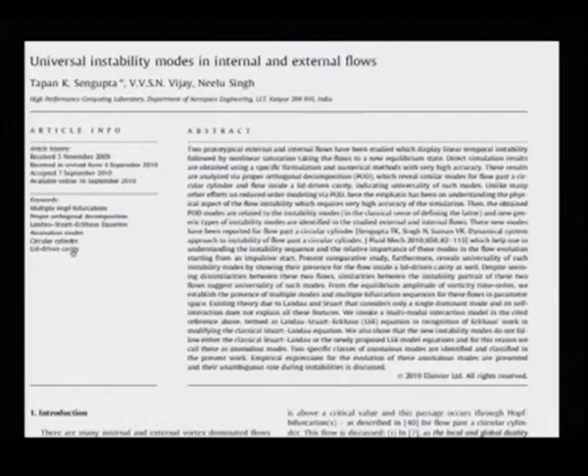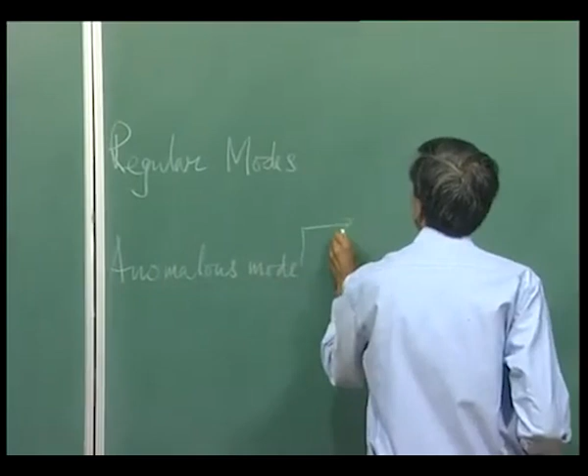So we have discussed an external flow. Today we are going to talk about an internal flow, and then show that the modes we talked about - 3 classes of modes, if you recall: the regular modes, then the anomalous modes, and there we talked about the first kind and the second kind for flow past a cylinder - so now we are going to see if these are generic enough to be visible in other flows also.

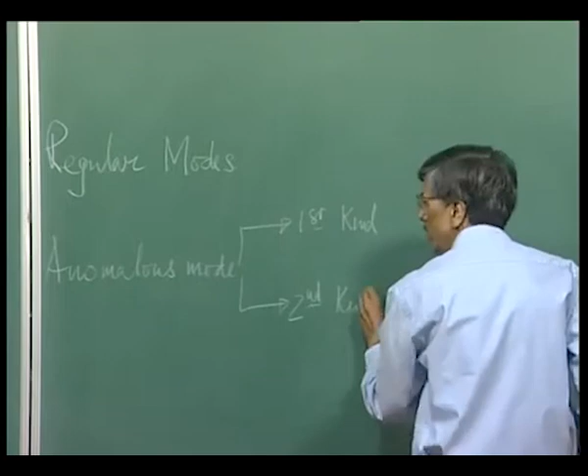So what we have done is undertaken to study the same thing for an internal flow. This is basically a lid driven cavity problem, as shown here. What we are going to show you here is a picture that will demonstrate what is going to happen.

We go through the same process of solving the Navier-Stokes equations and getting those solutions, then obtain the instantaneous flow, then obtain the mean flow, and then we calculate the disturbance flow. Once you have the disturbance flow, you obtain those Galerkin projections that we are seeing, and this is what your driven cavity problem is.

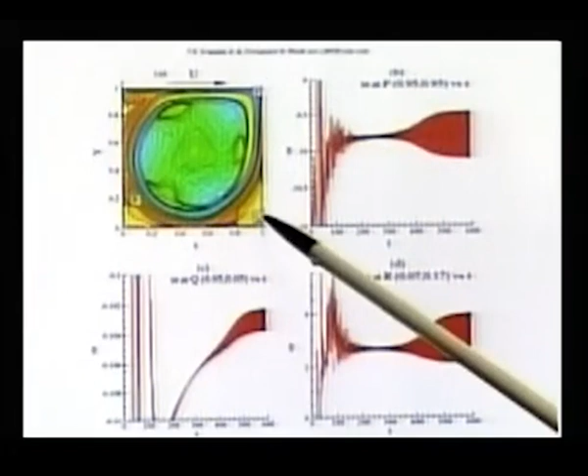What you have here is basically a square cavity. The flow is set up by moving the top lid from left to right at a constant speed u, and then we focus our attention on 3 representative points marked here as P, Q, and R. P is the topmost right corner point, Q is the bottommost right point, and R is over here.

Now, what you notice is depending on where you focus your attention, you see a different time evolution of this disturbance vorticity as a function of time. However, the common feature you are seeing here is almost the same: you start off with a semi-quiescent stage, which is perturbed by linear instability, and that linear instability is modulated by nonlinearity. That is the typical picture that we saw.

What is the essential difference between this flow and the flow past a cylinder? Here the initial flow is very chaotic, whereas in case of flow past a cylinder, what we saw was flow being completely steady. So the instability was building up on a steady flow, and here what you are seeing is the linear instability building up on a very transitory flow - it's showing very massive transients.

Now if you look at the other point Q - Q is one of those corner vortices, what we call Moffatt vortices. Even there, we are seeing the disturbance growing with time, but at the same time the mean is shifting. Recall we talked about the shift mode. What was the shift mode? Shift mode was this.

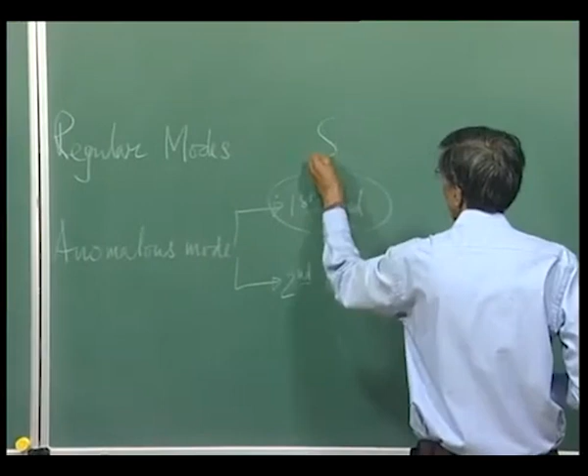This was what we called the shift mode. So here also we are seeing the same kind of thing: the mean is shifted, but overriding that mean you have the fluctuation that grows linearly and nonlinearly saturates. And this point, which is outside the corner vortices, also displays the same thing.

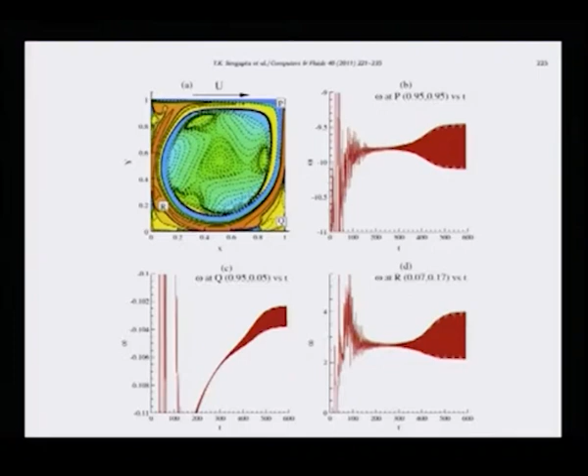So in a sense, what we are talking about here is the same type of behavior that we saw, but let me show you what we are going to see next. If we now obtain the equilibrium amplitude and plot it as a function of Reynolds number, then what we get is the equilibrium amplitude versus Re for this lid driven cavity problem.

And exactly like what we saw there, it is not a purely parabolic profile as the Landau equation would have demanded, but instead this equilibrium amplitude falls on various polynomials, and that, in concert with what we talked about earlier regarding multiple Hopf bifurcation, shows different Reynolds numbers noted here. As you can see, the first one is around 7,933, the second one is at 8,187, and the third one shown here is 9,953.

So essentially, whatever we have seen for flow past a cylinder is depicted here, and the corresponding experimental results by Strykowski are shown here - you get to see exactly a similar phenomenon, that it is not purely given by the Landau equation, but falls on various branches of bifurcation. This lends credibility to what we have been talking about in terms of the universality of this kind of instability modes.

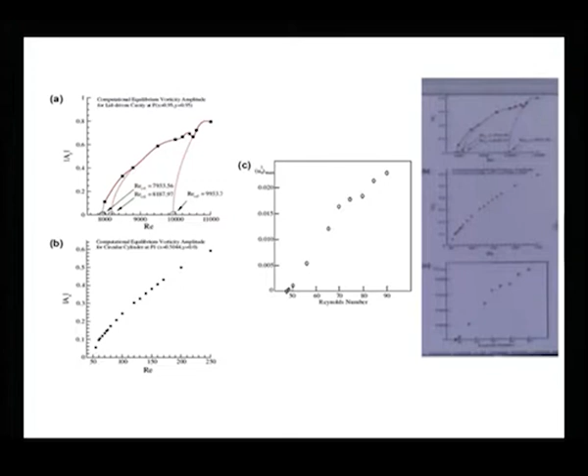And this was the result that I told you about Strykowski's experiment, and you can very clearly see there is one set of data here, another set of data here. So, this is not something that is just a construct of the computations, it does come out from experimental viewpoint also.

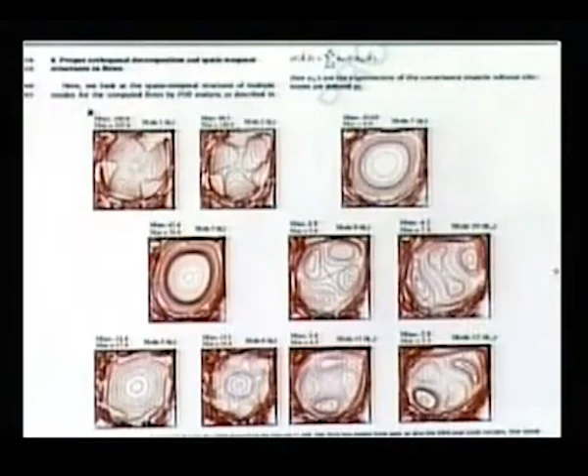And what is this? This is nothing but your anomalous mode of the first kind, the shift mode that we talked about, which appears singly. This has got no pair formation. Then of course, that would mean that if I am calling it 3, 4 would be the missing one. So this we have 5th and 6th, right. Again we have a 7th isolated one. This is also shift mode, or anomalous mode of the first kind, or T1 modes that we talked about.

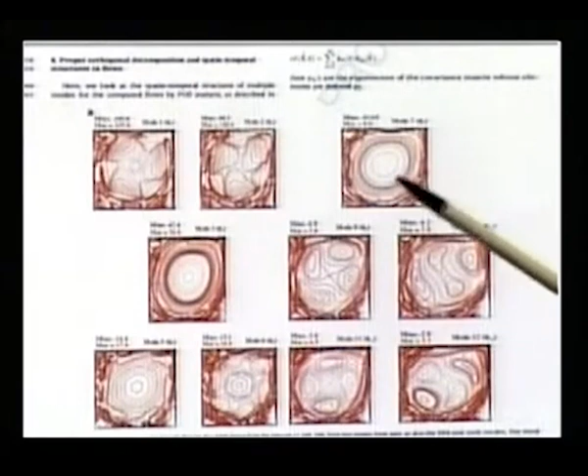Now, these are two pairs, these two are pairs, but they belong to this T2 kind. And how do we know? Well, you have to plot the amplitude functions. You will have to plot am of t. And once you do that...

Well, here are the pictures. A1 and A2, as you can see, is plotted here. They do indeed follow like the Landau equation. That is why we call it a regular mode. This is your mean zero line, and you are seeing the fluctuations, right?

And we have the third mode here, which was that shift mode we talked about, which appears singly, and that you can see does not start off from zero like flow past a cylinder, because of the strong transient nature of the flow to begin with. So it starts off with some value, but it does go and settle down eventually there.

And this is another regular mode pair. You can see that during the transient state, they do not have the pure orthogonality kind that you expect from POD modes. POD modes are supposed to be orthogonal, but they do not remain so. So it's very instructive for one to understand what is going on here.

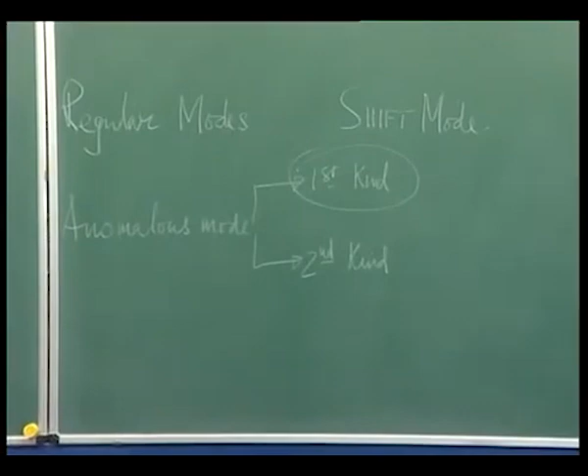So, that is the way to go about it. You do the singular value decomposition of the correlation matrix, you get the eigenvalues, that also gives you an idea of pair formation, etc. Then you look at the eigenfunctions, that gives you some additional information about it. But whether they are truly going to give you this sort of classification into regular and anomalous modes or not will be very clearly brought out when you take a look at that amplitude function Am of t. So this is a 3-step procedure. You cannot just simply look at one set and comment about it.

One thing you must realize also, though, is that people in performing POD have not been cautious enough. You are doing direct simulation here. You may be doing the same thing in an experimental framework, right. But then when you are trying to do POD, what is its sampling rate going to be? That is a very vital question. And that is where I think the rest of the world has really not done the homework properly.

Because if I am doing a kind of sampling of a time dependent function, I have to do it properly to capture the appropriate frequencies. Most of the time people may be doing high fidelity calculations, but when it comes to POD modes, they have been niggardly.

They take far fewer frames. And then, once you decide upon the sampling rate of POD analysis, that restricts what you are able to see. These kinds of simulations have been done to pick up this kind of frequencies. If I had taken what you are seeing here, we have shown it from 200 to I think 600.

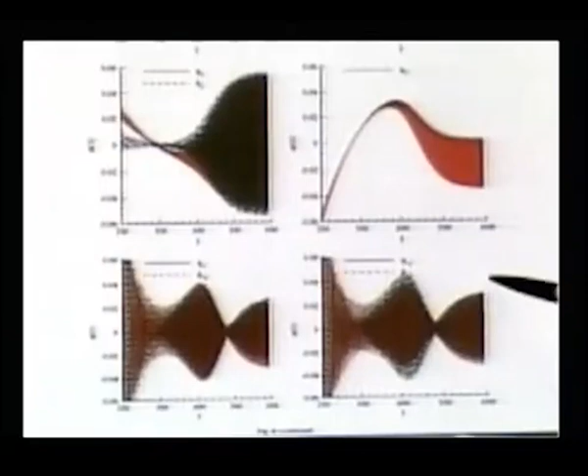So here the time interval, the sampling rate, is of the order of about 0.01, 0.02, that kind of thing. So you can imagine the volume of data you will have to handle to do a POD. And if you do not do it, you will not pick up all these frequencies.

So you must pay heed to the requirement of resolution, and this is a very vital issue that we must talk about. Now these are some of the things that we have seen for our circular cylinder. So there is no question about it, and these were also the sort of mode shape that we have seen for flow past a cylinder.

We have seen that the regular modes here, 1 and 2, then we have the shift mode, then we have another set of regular mode. This is a very interesting thing: in the end you get to a regular mode, but in the transient phase once again they are dissimilar. The individual components are dissimilar.

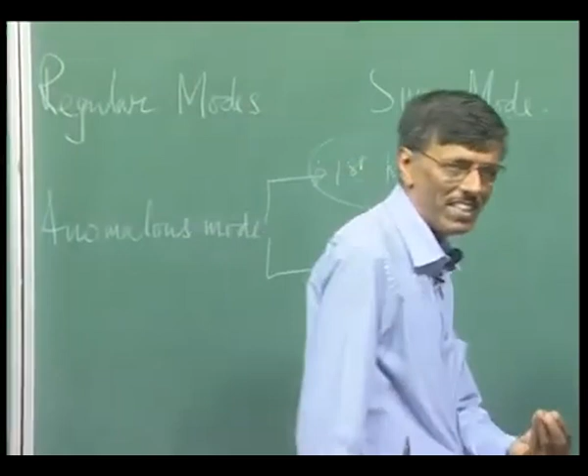Same thing over here. Should we call it a kind of T2 mode, or is it a kind of admixture of a T and R mode? Whatever we do, we need to understand that these elements are the basic ingredients. Whatever we are seeing at the end of the day is basically a kind of mixture of all these things that we see.

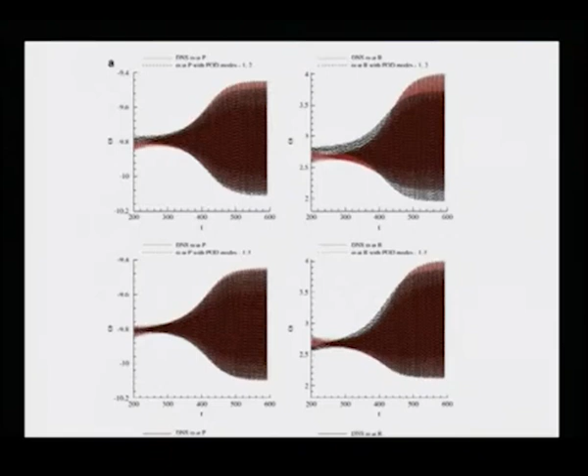Now this is what you are going to get when you look at the DNS of that internal flow, and here also you can notice that despite the talk of universality, there is some bit of difference in behavior of the successive modes at different locations. But by and large you can really capture the events we are noticing: linear instability followed by nonlinear saturation and mode behaviors belonging to either of these 3 generic classes.

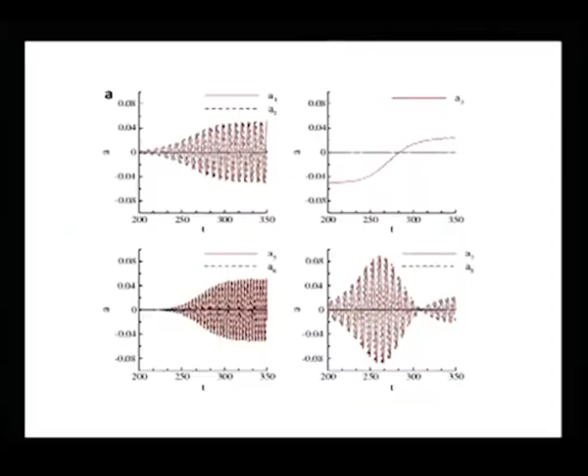Okay, so I suppose one can go ahead and do all this. These are those mode shapes for cylinders. I think what we are essentially looking at is a mode shape for flow past a cylinder at Reynolds number of 60, and again you can see these two are those regular modes. This is the T1 mode and this is the T2 mode, and so on and so forth. So you can study these as a sort of universal building blocks.

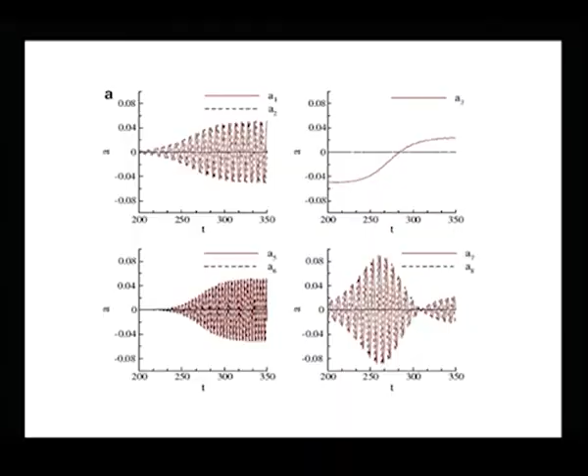Okay, so I think what I would do is close the discussion here on POD analysis. I suppose you have now seen quite a bit of variations. Now we go to the last phase of our course, and that is basically talking about turbulence.

So if you look back, the flow that we see in nature or in engineering devices, most of the time they are going to be turbulent, despite the fact that this part is considered to be a special topic in studies of fluid mechanics. But it is a sort of interesting thing, because this is not the exception, this is the rule. All flows are turbulent, but very little attention is paid to it.

There are various reasons for it, because we still do not understand what turbulence is. That is what we have said, that there are no precise definitions of turbulence. There are lots of people who can rattle off strings of sentences, turbulence is this, turbulence is that, etc. They essentially tell you about the characteristics of most turbulent flows. I am going to talk about some of those characteristics one by one, but please do not misquote me by saying turbulence is irregular flows, that's just one aspect. It is not going to be adequate.

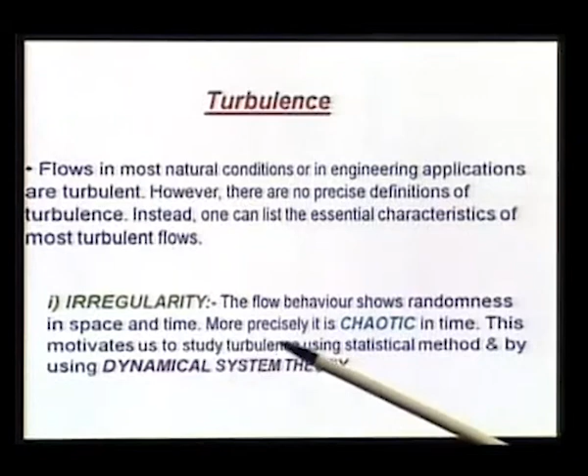That is what we have done with our POD analysis, that we will take a completely stochastic dynamical system and project it onto a deterministic basis. So those deterministic bases are nothing but your so-called coherent structures of turbulence. That is why people may like to study turbulence using statistical methods, or they may like to study it in a dynamical system framework like what we have just done.

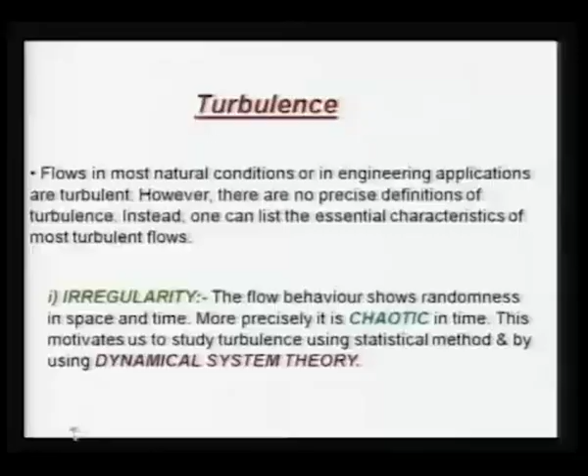So irregularity is one feature of turbulent flow. There is another feature, diffusivity. If you go back to when we were discussing bypass transition caused by those convecting vortices in the free stream, what did we see in that flow visualization picture? The dye that was coming out nice and straight got diffused. There was a significant increase in mixing, diffusion. So whenever you see turbulence, you must also understand there is enhanced mixing, characterized mathematically by the process of diffusion. Diffusivity is very, very important in turbulence.

They represent rapid mixing in terms of all quantities of interest. There could be mass diffusion—if I add a dye and it gets mixed with the adjoining fluid, that is basically mass diffusion. At the same time, when I see a shear layer developing, the flow undergoing transition and becoming turbulent, what do I see? Thickening of the boundary layer. So the mixing is occurring over a larger wall-normal distance—that is enhanced mixing of momentum. And of course, when mass and momentum are transferred, that leads to energy transfer too.

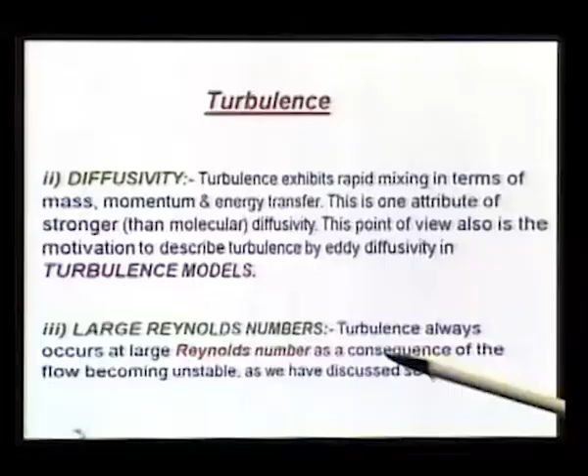There is another thing very typical of turbulent flows: you would hardly ever get turbulent flows occurring at low Reynolds number. But please mark my words very carefully—whenever we talk about turbulent flows, we are talking about turbulence generated by some mechanism which is also self-sustaining. Remember that experiment when we dragged a single vortex? What happened when we removed the vortex? Things again came back to normal.

Would I call that a generic turbulence? No, because that was more like forced vibration.

But when we are talking about turbulence, we are more talking about natural vibration. So it is self-sustaining, it should be there, it should be there, and that kind of self-sustenance comes about when your basic equilibrium flow is unstable. So instability is the core of everything.

That is why in this course, although it is titled Transition and Turbulence, I have spent most of my time talking about the transition aspect, with twin objectives. One, all these phenomena are instability driven, and two, to basically fight the ghost of the commonly held perception that turbulence is universal.

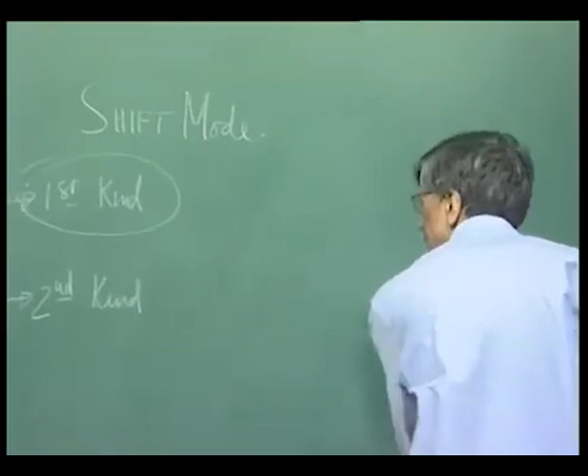There is the other aspect of turbulence that we must keep in mind. This has to do with the way we look at the Navier-Stokes equation. If I write down the Navier-Stokes equation...

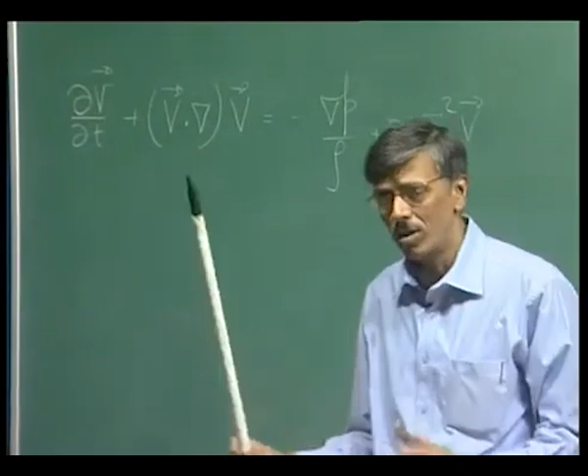Then we can understand the basic processes, which are very clearly understood. This is the local acceleration at any point, the time rate of change of events occurring, that is what is given. This is your convective acceleration. This is the way, let us say, the pressure is driving the flow. You may have it, you may not have it.

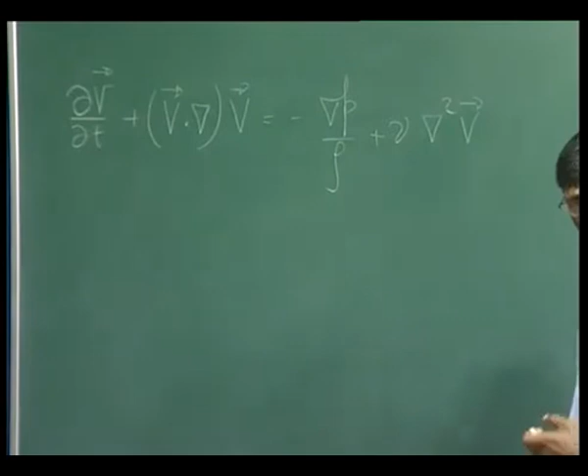Then of course, this is the viscous diffusion. Of all the terms that you see, this plays quite an interesting role. This is your nonlinear term. If you are a mathematician, you would say it is a quasi-linear term, because the highest derivative is second, and that is where it is linear. But this is a nonlinear term that plays a significant role in determining the dynamics.

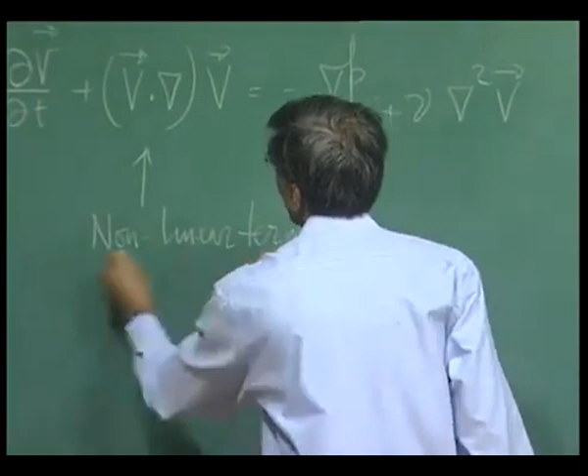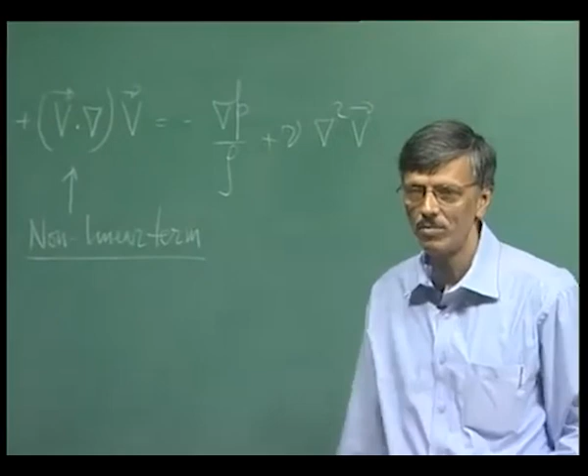We have already seen that all instabilities do start up from here. Why? If you recall, we have written down the Navier-Stokes equation in rotational form. What happens? I can write it down in terms of v cross omega and gradient of v squared by 2.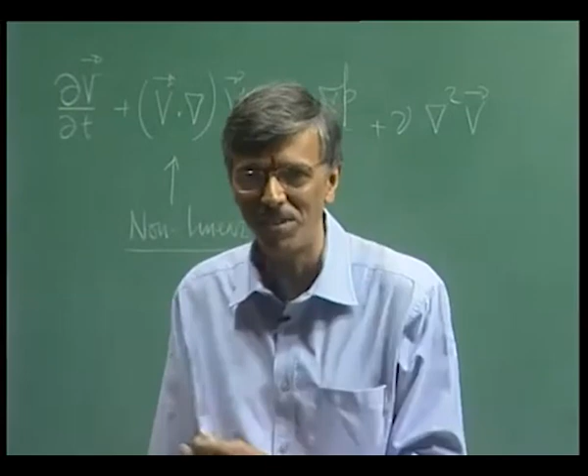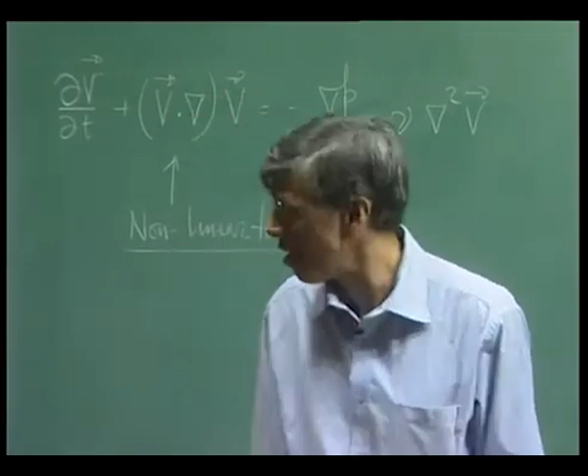What I do is, if the flow is irrotational, that term will go away. So what is the nonlinear term doing? Just simply redefining the pressure, P by rho plus half v squared. That is what we are talking about, the role of rotationality. So if I do not have rotationality, nonlinearity does not do much, it just simply redefines the pressure. This is something we need to understand, that rotationality is central in understanding turbulence.

And what about the three dimensionality? Three dimensionality is written down when you take a curl of this equation, and then you get the vorticity transport equation. So you take a curl...

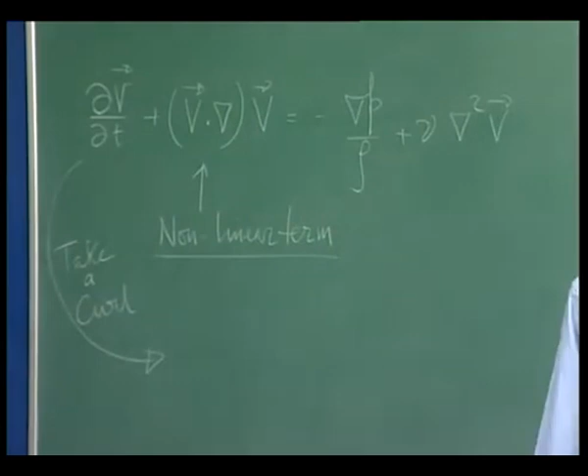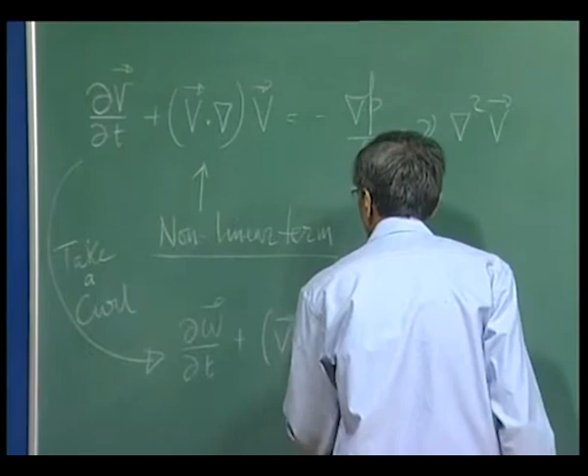And then you get the vorticity transport equation. How does it look like? Well... So this is your vorticity transport equation.

So what we need to do is basically look at this and understand what each of these terms is doing. This term is rather important. This is what is called the vortex stretching term.

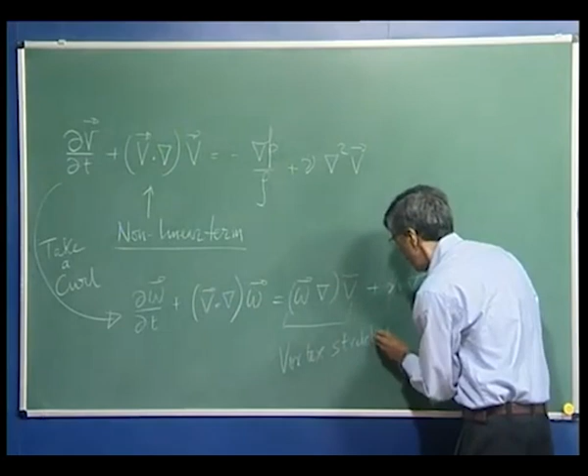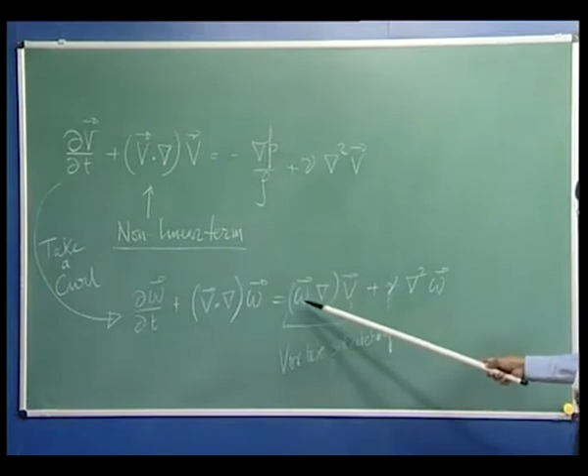You can very clearly see that this term will be identically equal to zero for two dimensional flow. Why? Because your flow gradient will be in, let us say, the xy plane, and omega is in the normal direction, the z direction, so omega dot del is identically zero. So what we need to understand is that this vortex stretching is only for 3D flows. For 2D flows, it is identically equal to zero.

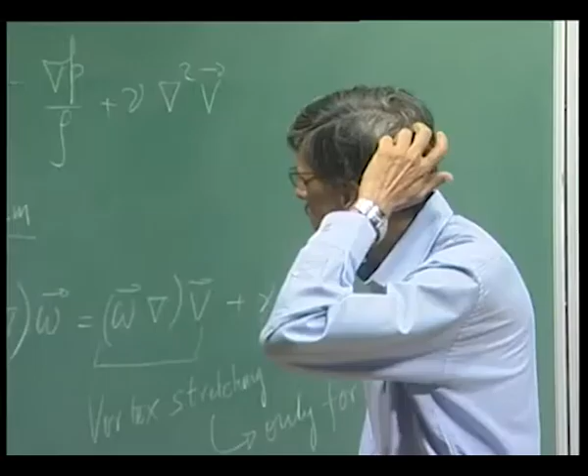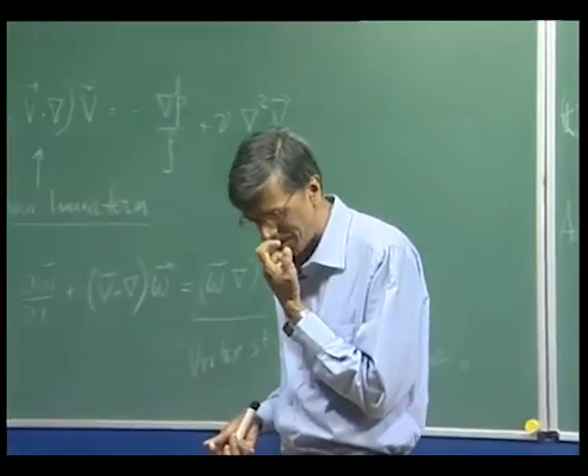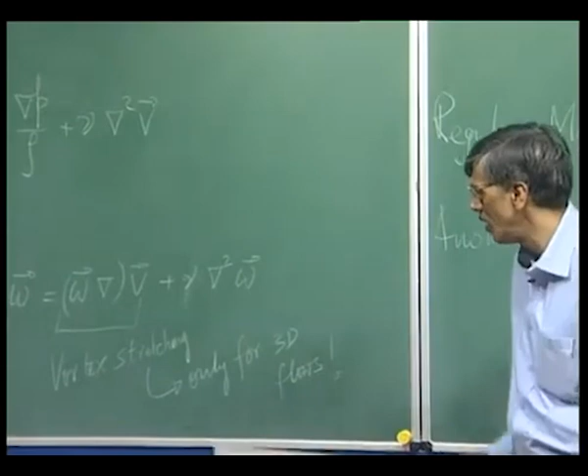So what happens is, you can understand that vortex stretching will only be there for 3D flows and not for 2D flows. And this is what has perplexed the fluid dynamics community for the last half century. So what really happens is, this tells us when this is going to be important.

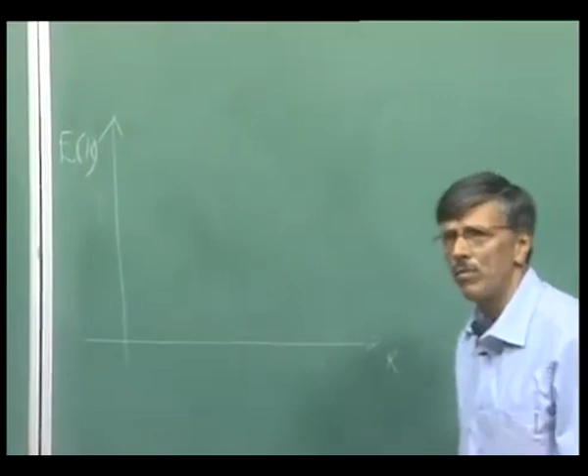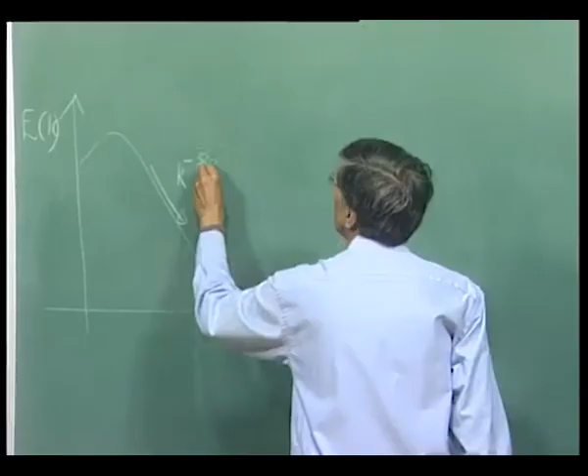You are seeing that vortex stretching will not be there for two-dimensional flows. What does vortex stretching do actually in a real flow? That you will understand when you look at the energy spectrum. If I plot the energy spectrum of a typical homogeneous flow, it would be like this—the way energy is transferred from small k to large k. One of the mechanisms that can do that is vortex stretching.

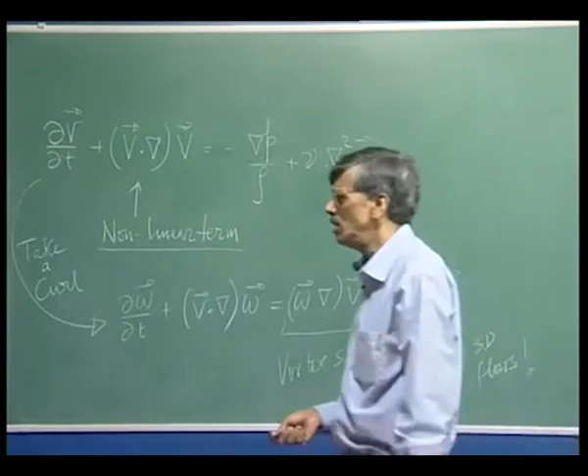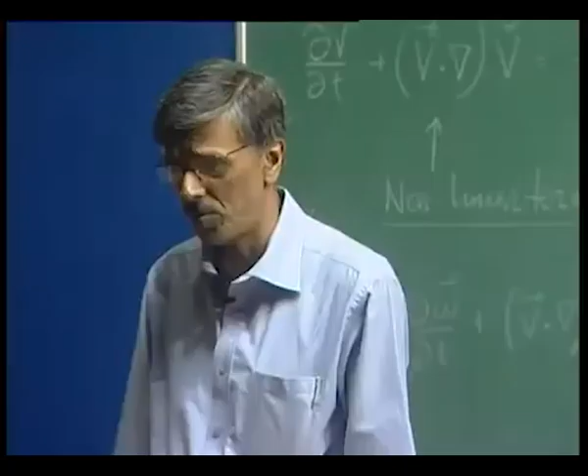This was shown by Kolmogorov, that the slope k to the power minus 5/3 can only happen corresponding to vortex stretching. So if we look at turbulent flows, they are always characterized by three-dimensional vortical fluctuations. Vorticity dynamics, of course, plays a central role in all fluid mechanics, more so for turbulent flows, because we have defined turbulence as an ensemble of eddies of different kinds. Eddies means vorticity, right?

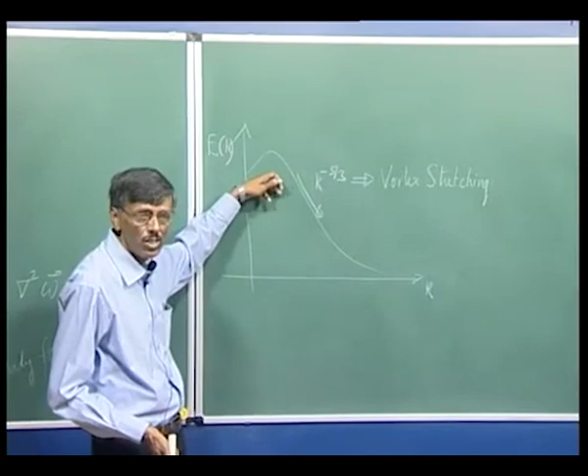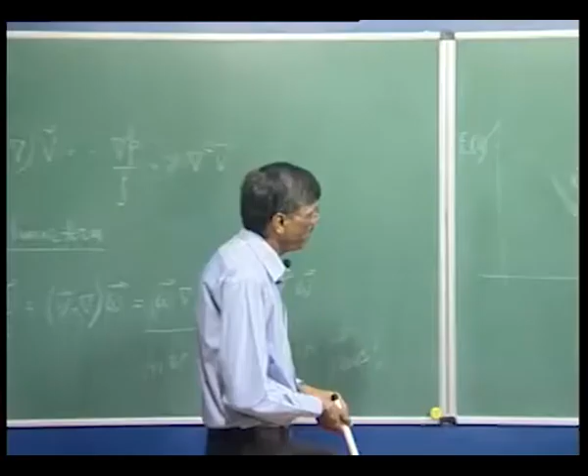Circulation—so of course vorticity dynamics has to play a central role. This nonlinear process of vortex stretching transfers energy from small k to large k. That means it is basically siphoning off the energy from larger to smaller eddies. If I don't have this vortex stretching, I would not have a powerful mechanism by which energy is transported from larger to smaller eddies.

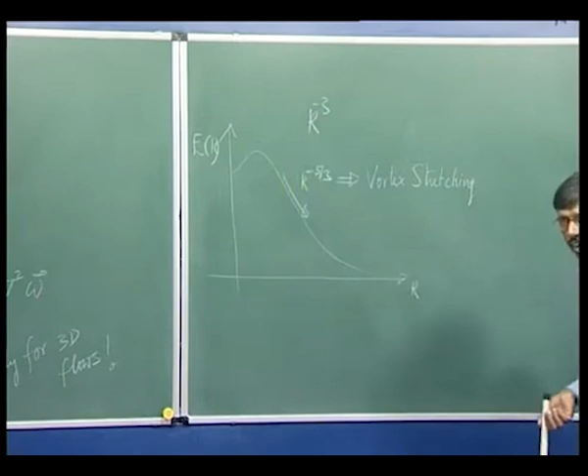But please do understand, a very large part of the sky is dominated by 2D turbulence. Nothing exemplifies this better than atmospheric dynamics. I will show you some results as we go along. When we look at atmospheric data, we will see that the energy spectrum is not given by k to the power minus 5/3, but by k to the power minus 3. And this is an attribute of 2D turbulence.

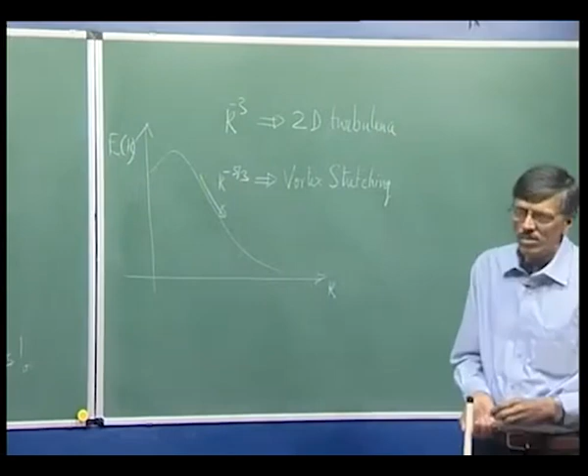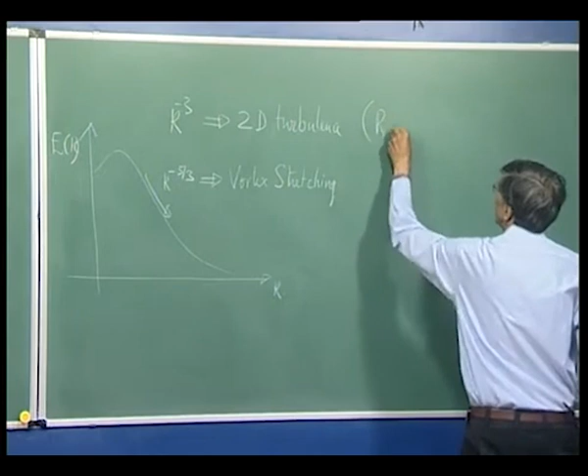Although people used to think 2D turbulence was sort of an anachronism, just studied for its own sake, lots of people are waking up to the reality that you can have 2D turbulent flows. Kraichnan did lots of pioneering work in this. One of the postdoctoral students of Einstein working on turbulence was Bob Kraichnan. He had done a lot of work.

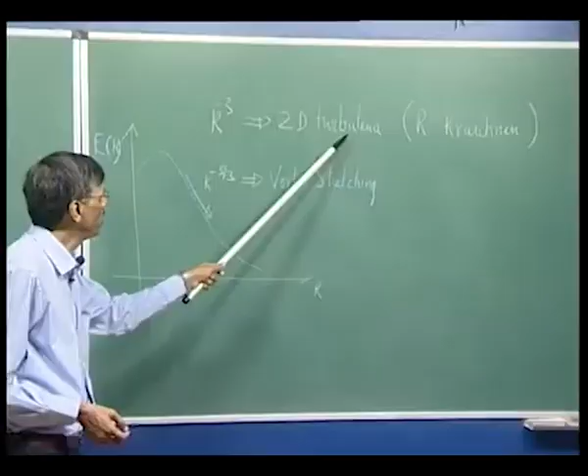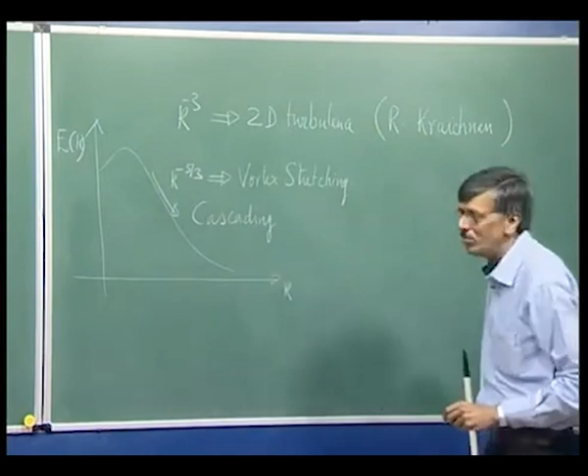2D turbulence is characterized by k to the power minus 3. It is also characterized by a physical process where smaller eddies merge together and form bigger ones. This is what is called inverse cascading. So this process we are seeing here is what is called cascading of energy. But 2D turbulence displays what is called inverse cascade.

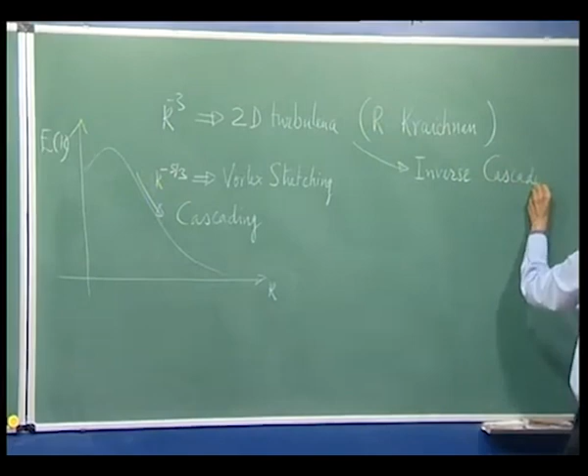Conceptually, this picture is not difficult to visualize, because we are talking about smaller eddies joining up together—it happens all the time. It's nothing very sacrosanct, but mathematically it was shown that when you have 2D turbulence, one of its attributes is, of course, this inverse cascade. That is why I specifically say we are open to ideas of 2D turbulence, as evidenced plentifully in atmospheric dynamics. We will show that.

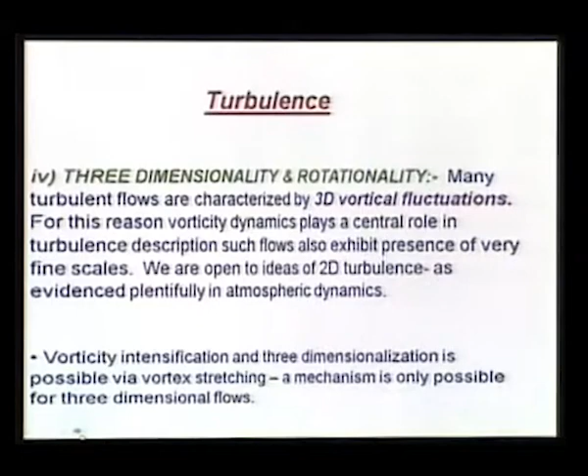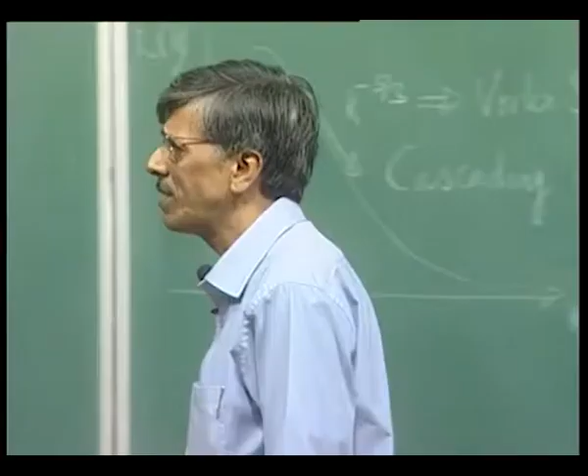Vorticity intensification and three-dimensionalization is possible via vortex stretching—that is what we talked about, a mechanism possible only for 3D flows. But you have already noted certain things where different scales can come about. For example, think of Kelvin-Helmholtz instability. You have a uniform flow on top and a uniform flow at the bottom. There is an interface, disturbed by some background disturbances, and this interface curls up into vortices.

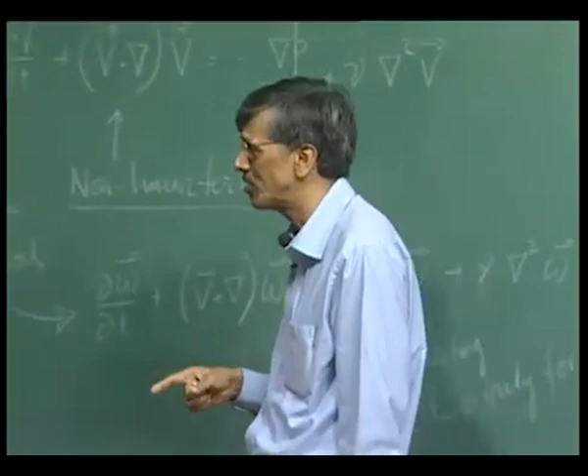So that is basically a direct mechanism of creating vortices of various sizes, right? And we noticed it was possible more so for a 2-dimensional flow than a 3-dimensional flow. We established that 2D flows are more prone to Kelvin-Helmholtz instability than 3D flows, remember. So sometimes this 3D card is overplayed, but we need to understand there are many instances—this is one of them. And what was so important about Kelvin-Helmholtz instability is that it was an inviscid mechanism.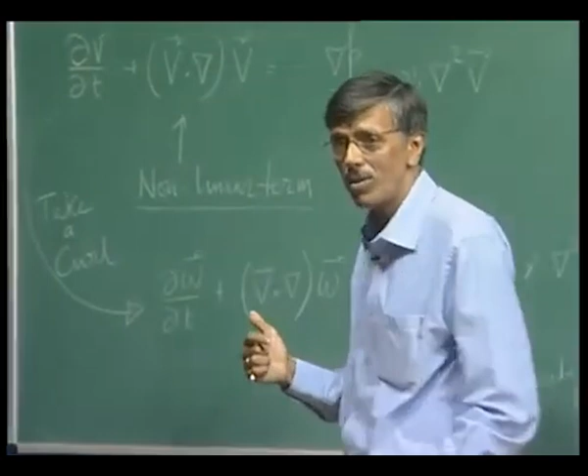So you do not need an elaborate viscous mechanism to produce the instability—you can directly get it from a 2-dimensional flow. You have the shear, and shear is of course synonymous with viscous phenomena, but we are talking about the disturbance growth mechanism, which could be completely an inviscid mechanism. That is one thing we must understand. We already talked about inverse cascade, and we have said that the spectral distribution of 2D turbulence is qualitatively different than what you get in 3D flows. And one of the central themes of this course, as we have talked about, is the phenomenon of dispersion.

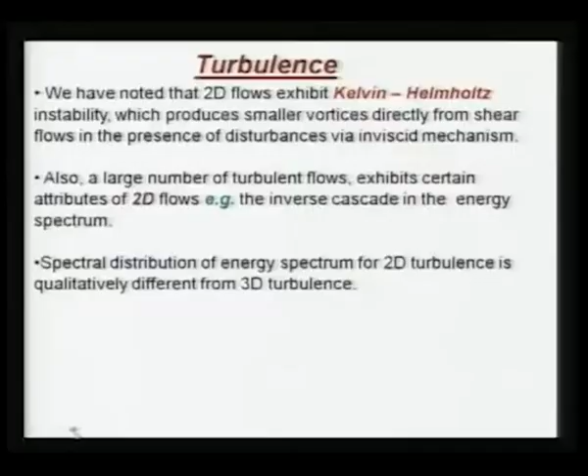We have seen dispersion is a very strong mechanism by which different scales can be created. Remember, we talked about those trains of vortices going over a shear layer. So I may define a length scale given by the spacing of successive vortices. However, because of the dispersion relation, I could create a whole host of length scales. So do not be too taken up by thinking only about vortex stretching and nonlinearity. Those instabilities, we talked about linear instabilities - the linear mechanism itself can give you a whole host of length scales. So we must be aware of this.

Now, this is a phenomenological observation: turbulent flows are more dissipative. Ask an airline operator - they will complain till their face turns blue because they spend all the money since the flow is turbulent. They would love to have laminar flow. That is because we have very high dissipation in turbulent flows. That is not very unusual for us to understand - we have already talked about diffusivity. If I have larger diffusivity, I will have larger dissipation. So that is okay.

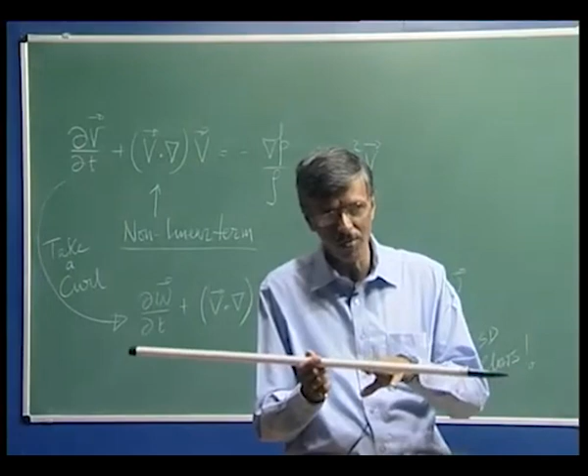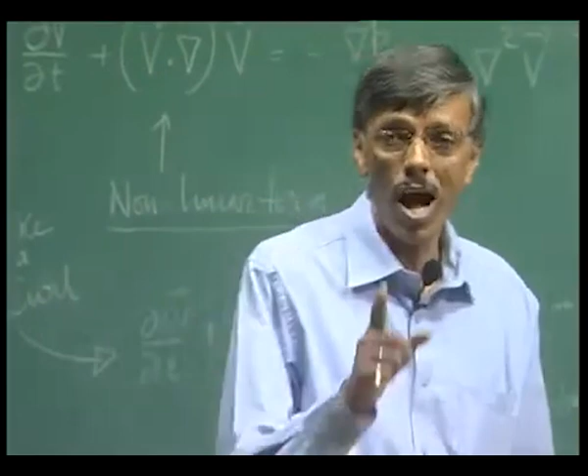Physically, if I have a laminar flow, I will have a thinner shear layer. So this transition from a no-slip wall to the fully developed flow occurs over a thinner section. However, if I now set in motion turbulence, what will happen? This will become thicker. How do I do it? I just create a stronger motion at a macroscopic scale which is random. That is what we talked about - turbulence is randomness at a macroscopic scale. You have randomness at the microscopic scale even for laminar flow, but turbulence is special in that it brings randomness at the macroscopic level. That is something we need to understand.

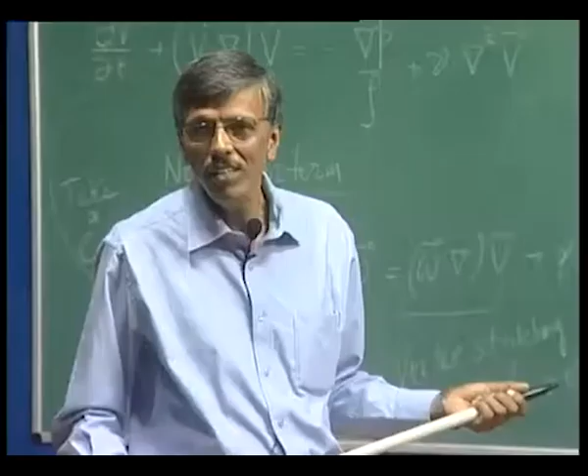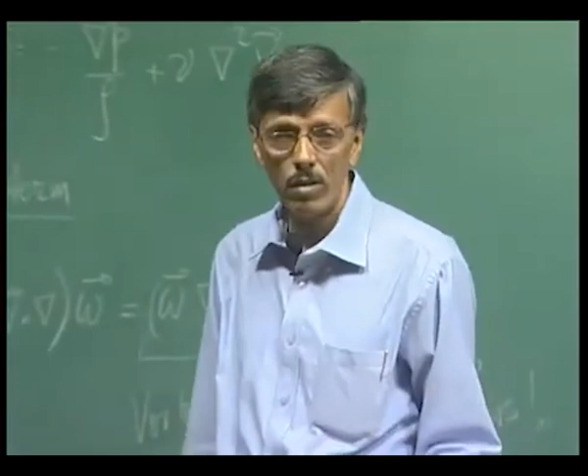So when I have that, what happens? The moment I remove orderliness and bring in randomness, then from your thermodynamics knowledge you will say, of course, internal energy is increasing. Earlier, the flow was spending all its energy going along the streamwise direction. Now you have created motions in all possible directions. So you have actually lost a lot of ordered kinetic energy and converted it into internal energy. This disorganized energy increase implies large irreversibilities - that is where your entropy increases, as we have talked about. Such transformation, needless to say, will imply dissipation. So in fluid flow, orderliness is laminar motion, carrying motion which is coherently directed, but the moment you bring in turbulence, you have an additional source of entropy production and loss of orderliness, which leads to larger dissipation.

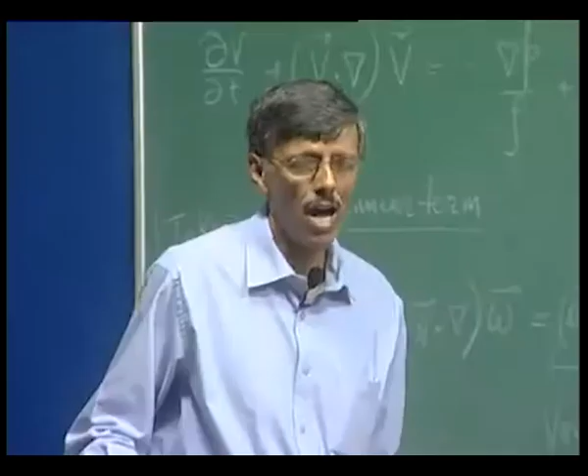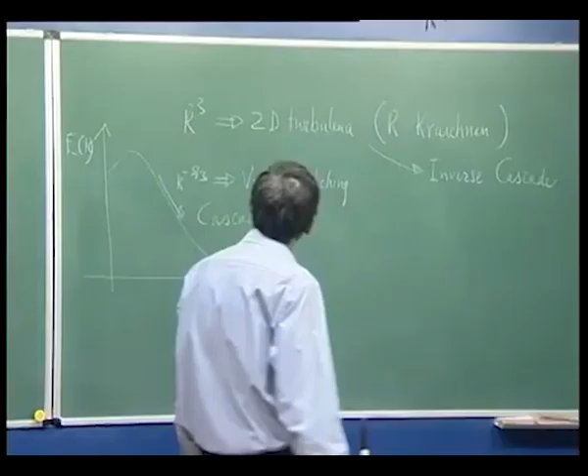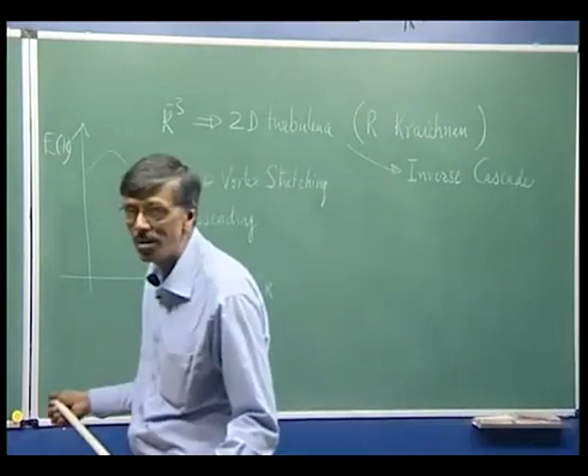Having said all this, we have already emphasized that turbulence occurs at a macroscopic scale. Do not ever be deceived into thinking it is a molecular phenomenon - it is not. So what happens is you still view the flow as a continuum. You do not have to approach the study of turbulence by looking at the microscopic level; you look at it at the macroscopic level as a continuum. If I look at the energy spectrum, it just goes somewhere and stops - so it has a finite cutoff wave number. If I call that k cutoff, this k cutoff corresponds to a length scale. That length scale is many times larger than the mean free path in gas flows or the molecular scales in liquid flows. So they are not a manifestation of flow phenomena at the molecular level - it is basically happening at the macroscopic level.

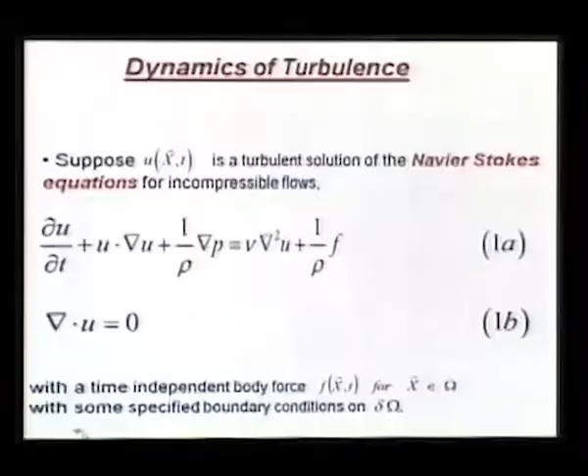So let us try to understand the dynamics of turbulence, which we will talk about in greater detail in the next class. Today, I will simply say that whatever attributes we have talked about - the velocity field, if I write it as u, is going to be a function of space and time. You cannot have a steady turbulent flow. So please get away from the habit of calculating turbulent flows using a time-averaged equation and thinking the flow is steady. So u will be a function of x and t. The governing equation, for incompressible flow, will be given by momentum conservation and mass conservation. We will start from here in the next class.

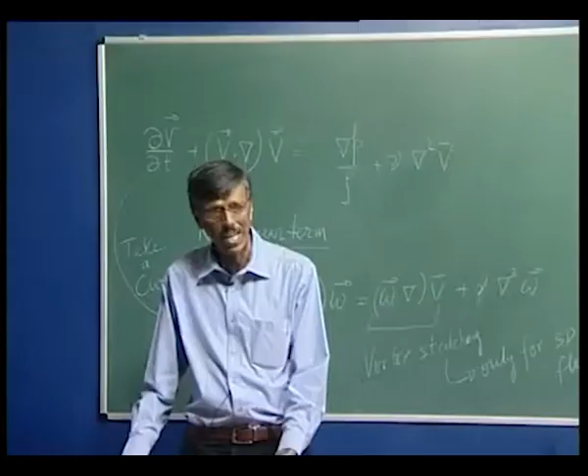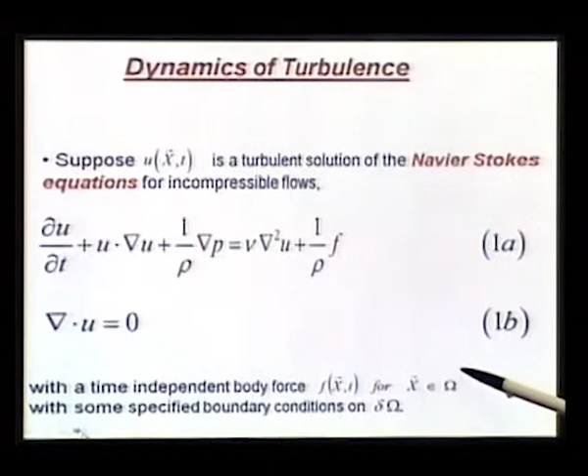The F that you are seeing here - we have purposely kept a body force which could itself be time independent, or there could be other sources bringing in time dependence into this equation. We have seen instability is one such mechanism - a unidirectional flow coming in and then becoming time dependent, but a body force will keep it as it is for the whole domain, and unsteadiness can also come from the boundary conditions. So if the domain is omega, the boundary is del omega. We will stop here.